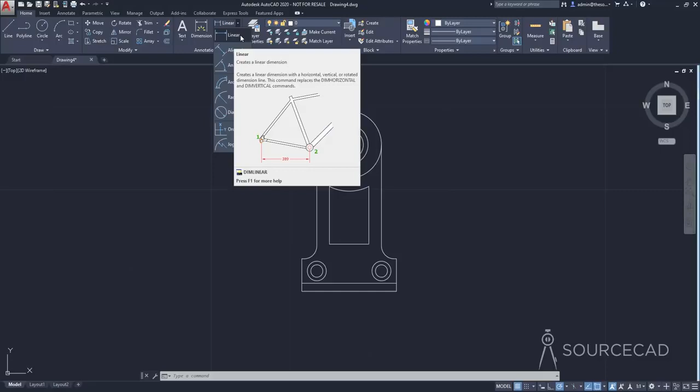So to dimension this drawing which we made earlier, I'm going to go to this annotation panel, and right here we have the tools for dimension. So you can use this dim tool or the dimension tool, or you can use any of these existing tools. In this case, I'll use these tools and I'll make the very first dimension using linear. So I'll go to linear and I'll add a dimension here.

Now to add the dimension, all you need to do is select the first point, second point, and a point where you want to drop the dimension, and you'll have the dimension like this. Now this dimension is far from being perfect. It is very big. Even the arrow size and everything else is big. If you want to modify it, then you can do that using annotation panel.

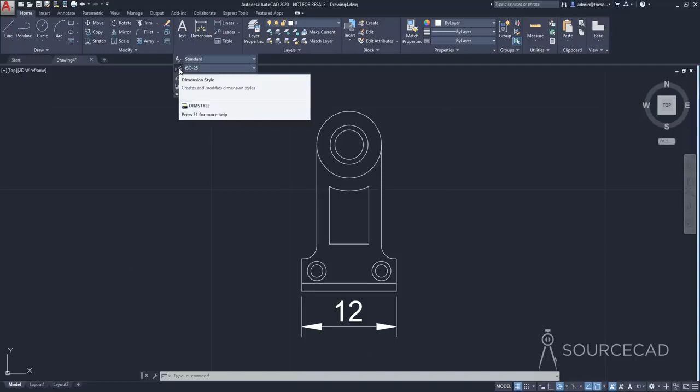So I'll expand the annotation panel and I'll click on this dimension style option, which looks like a dimension line with a paintbrush above it. Now I'll go to modify, and here I'll go to fit tab, and I'll change the overall scale. That's the only parameter which I'm going to change here in this case, and it's 1. So we need to decrease the size. So maybe I'll change the size to 0.25 or maybe 0.2,

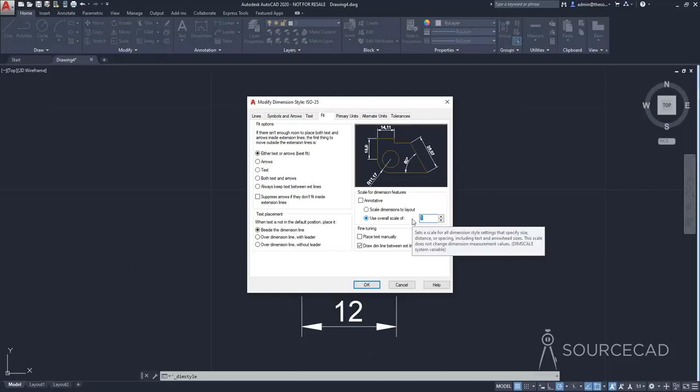and OK, and close. And now the size of dimension is 0.2 times its original value, and this looks pretty good. Now using this size, I will make other dimensions. In your case, the scale of 0.2 may work, or maybe you need to change it to some other scale. That depends on the drawing which you have selected.

Now this is linear dimension. If you want to add a radius or a diameter, you can select the radius. So go to radius, click on the circle, and again click, you'll have the radius. For the diameter, select diameter, click on the circle, and now you'll have the diameter symbol. So as you can see, you don't need to add the phi symbol and R symbol for the radius and diameter. AutoCAD will take care of this for you.

In a similar way, we have dimension like angular if you want to add angles. So here I'll select the first line, second line, and click again to add the angles. So you can add these dimensions pretty easily like this.

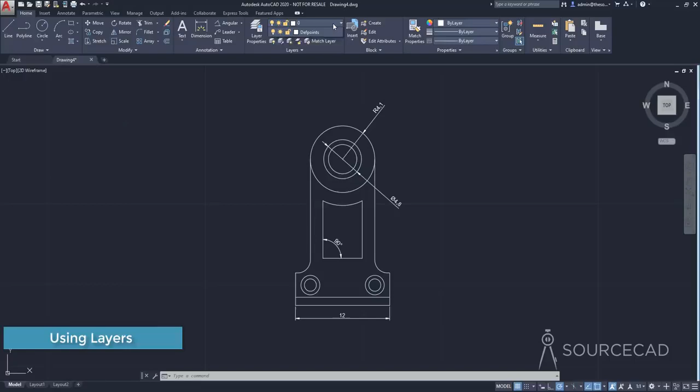Now after adding dimensions, let's talk about layer. So currently we are making our drawing on layer 0, which is the default layer. And if you want to add more layers, then you can go to layer properties and add the layers that you want. So we are working with 0 layer. As you can see, we have a check mark right next to layer 0. That indicates our drawing is in 0 layer.

I'll click on this new layer and I'll call it dim, short for dimension. And now I'll use this layer to put our dimension. So now I'll close this layer property manager. I'll select all the dimensions which I've made here, and I'll go to this drop down and I'll select dim. Now all our dimensions are on dim layer.

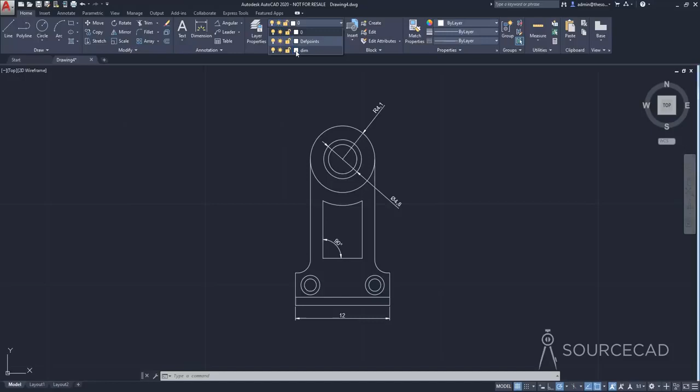So what are the advantages? Well, the first thing is you can change the properties, like you can change the color from here. So I'll go to this white box, I'll change the color of dimension to red, click on OK, and look at this. All the dimensions will change their color to red.

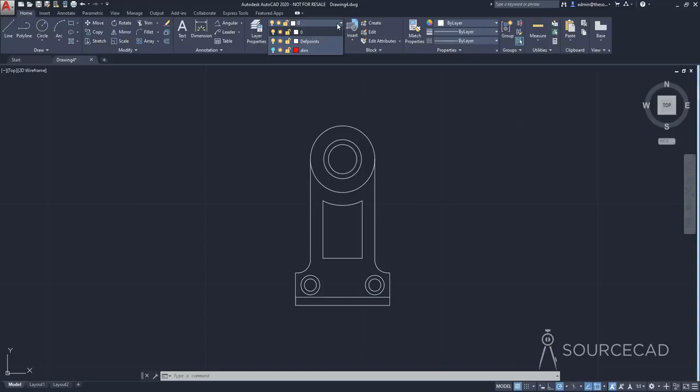Also, let's say you want to hide the dimensions, you can click on this light bulb icon and the dimensions will simply disappear. They are still here in the drawing, but for now it's hidden. To bring it back, you can go to the drop down and activate it again. So that's the advantage of putting objects on their respective layers, so that you can control their properties using the layer property manager.

Now let's also talk about blocks. So blocks are symbols, and you can use these symbols in your drawing, and they have their own set of advantages. So I'm going to make a simple window here using the rectangle tool, and also I'll maybe use arc tool.

So first point and second point, third point, then line, and again. Alright, so here we have a simple window kind of shape. Now in this case, all these objects are separate.

They are made separately using different draw commands, but you can convert this into a symbol, and that symbol is called block. Now to convert it into a symbol, I'll go to create block on the block panel. I'll give it a name. So let's call it window. Now we need to specify some parameters like pick point.

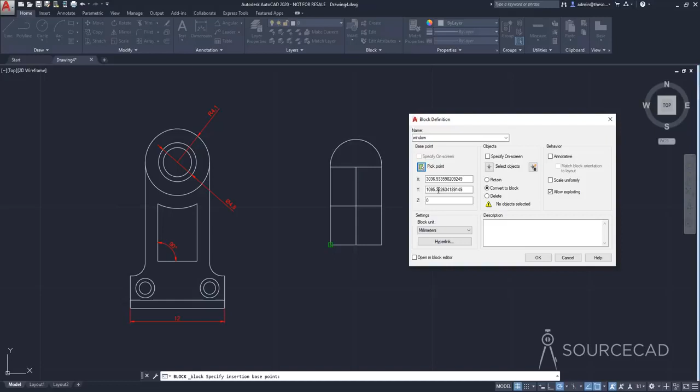Select this and specify a point that will be the base point or the pick point of this symbol or the block. Now select objects, click on this box and select all the objects and press enter. And I'll simply click on OK now.

And now if I hover my cursor, it will show this as a single object. If you select it, it will only show the pick point or the base point which we specified, and now this one will work like a single object. Now what's the advantage of this?

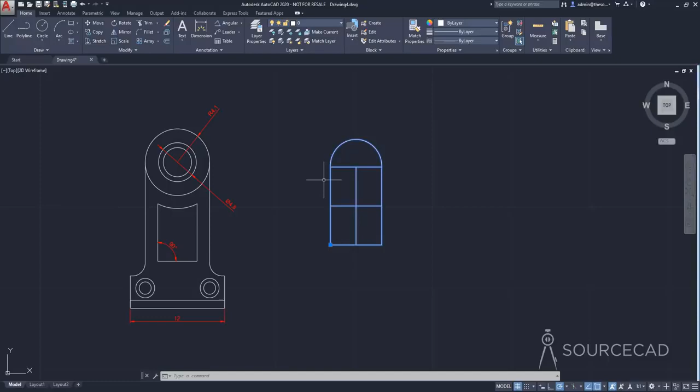Well, if you now go to insert, you'll notice that now we have this window added here, and you can now insert as many copies of this window from here, or you can also make copies of this block from here. All right. Now, all these blocks can be modified directly by modifying any one of these block references.

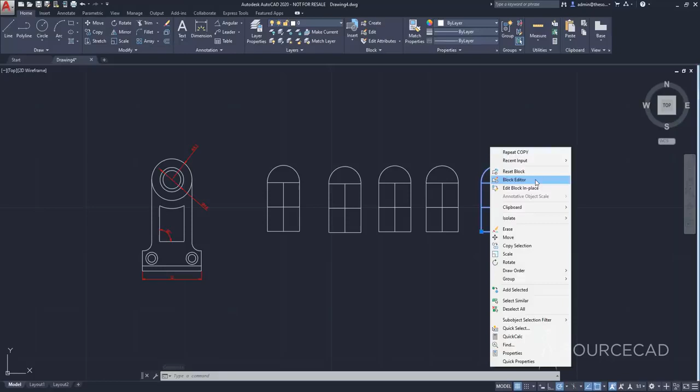So maybe I'll just select this block, and then I'll right click and I'll select block editor. So this is the place where you can modify the blocks. So look at this. Now this is the block editor. As you can see, we have a tab here, and here it will work again like separate objects.

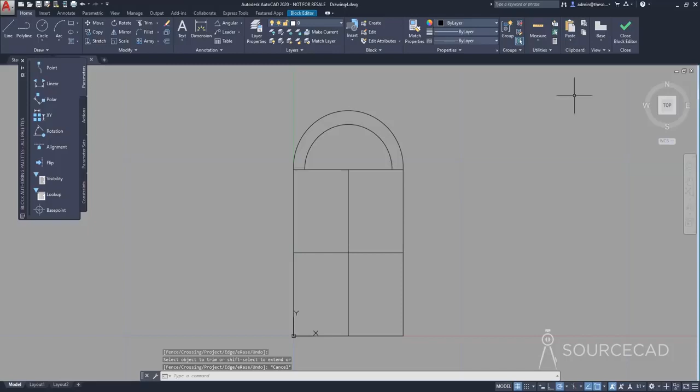Here I'll modify this. So I'll go to circle and I'll add a circle maybe here. Then I'll go to trim, enter, I'll trim this line and this line. And we have a different kind of window now. I'll go to close block editor, save the changes, and look at this. All the blocks now modified.

So that's the advantage of using blocks over simple copy paste of symbols. It can modify all the references, actually, just by modifying the actual block. So we have our drawing, and we are pretty much done with the basics of AutoCAD, and now I believe you are familiar with the tool sets required for making your own set of drawings.

Finally, after making any kind of drawing, you would definitely want to plot that drawing, and plotting is also pretty straightforward in AutoCAD. So let's finally learn about plotting our drawing. Now to plot our drawing, I'll go to this plot option, and here I'll specify firstly the plotter. So in this case, I will select DWG to PDF. I want to plot my drawing as PDF.

Now the paper size, you can select from any of these existing paper sizes. In this case, ISO A4 is selected. I'll keep that one. Now for the plot area, display is selected. That means whatever is displayed will be plotted. In this case, I'll change that a bit. I'll change it to window. We want to plot everything inside of a selected window.

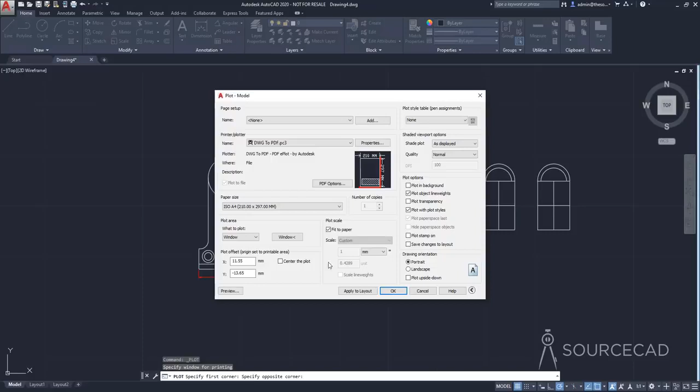So now I'll click here, and I'll click here. And now all the objects inside that window will be plotted. All right. Now look at this paper. So this is how your plot's going to look. This is our paper, and your plot will be somewhere over here. So we have problems here. This area is completely blank. We just want it centered.

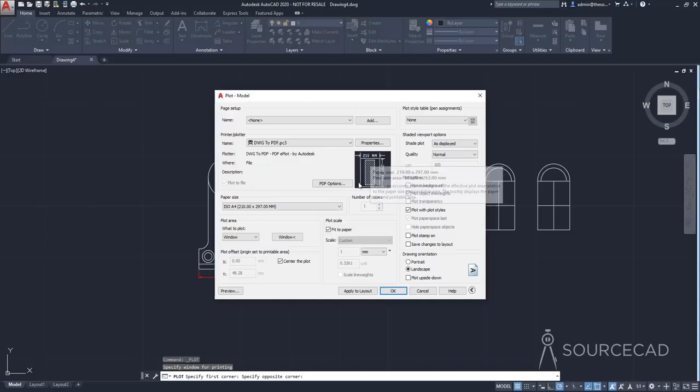So to do that, click center the plot, and now this will be centered like this. Again, we have a problem. This is in portrait orientation, whereas we want it in landscape. So go to drawing orientation and select landscape. There we have it. It's now changed. All right. Now click on OK, specify the location and save it. And here is the final output in PDF format. It's pretty easy and straightforward.

So I hope you have found this AutoCAD Basics for Beginners video series pretty helpful.